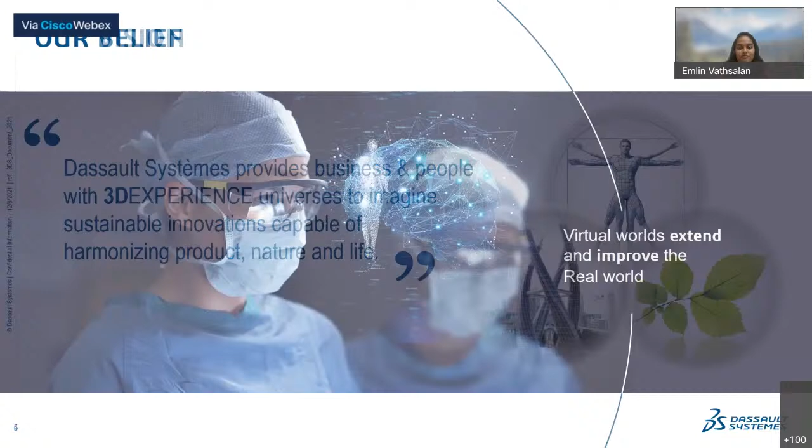Our vision is to provide business and people the ability to imagine innovations that are capable of harmonizing product, nature, and life - which means we want to live sustainably, and we believe this is possible only through engineering technology. We profoundly believe that virtual worlds extend and improve the real world. There is no such thing as rehearsals in the actual world, but in the virtual world we can simulate and evaluate the impacts that a product has on the ecosystem. So before the product is even produced, we can leverage and exploit the virtual world in order to have a sustainable future. We inspire and support our customers to leverage the virtual world through simulations and improve toward a sustainable future.

Now that we have seen a good overview of Dassault Systemes, I would like to step into the next topic, which is the industry challenges that the aerospace and defense industry is facing in today's world. We all know that this is the age of digital transformation, and in this age there are a set of challenges that the industry is facing. In specific, the aerospace industry's biggest challenge is the budget and time constraint.

Today the A&D industry is facing difficulty in controlling cost overrun, and is also missing delivery deadlines. This has not been a rare case - it has become a usual or common scenario in the past decade. So this is one biggest challenge with regards to budget and time constraint.

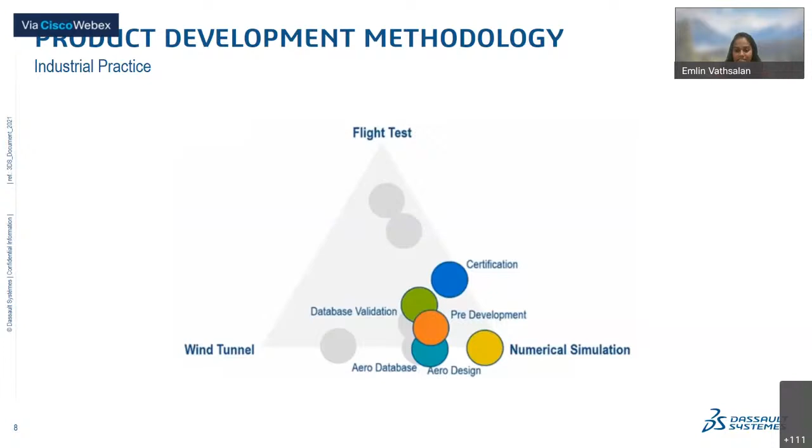So now with this emerging industrial practice, the time to market cycle is compressed. Now we do not have to think about physical testing. It can either be reduced or even replaced by numerical simulation. And just right after the preliminary or detailed design phase, we can straight away jump into the flight test or the prototyping test. So this is the industrial practice that is emerging.

Today, in specific, we will be focusing more on the fluids pillar, and we will look at the offerings that Simulia has to cater to customers when it comes to the Simulia fluids portfolio. So in the Simulia Fluids portfolio, we have two major technologies and three major tools.

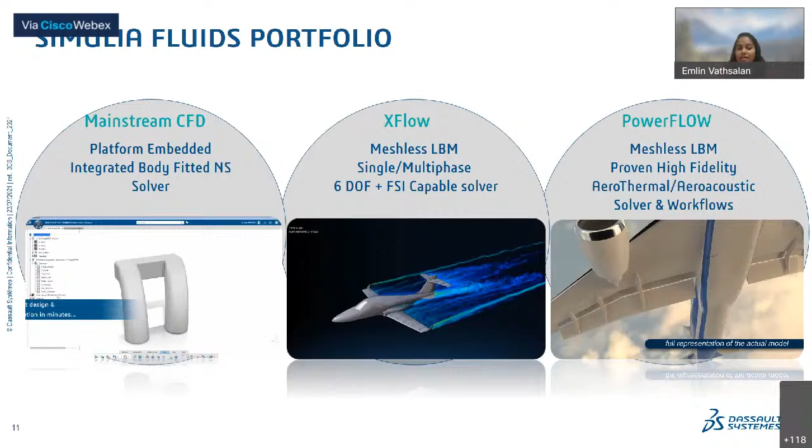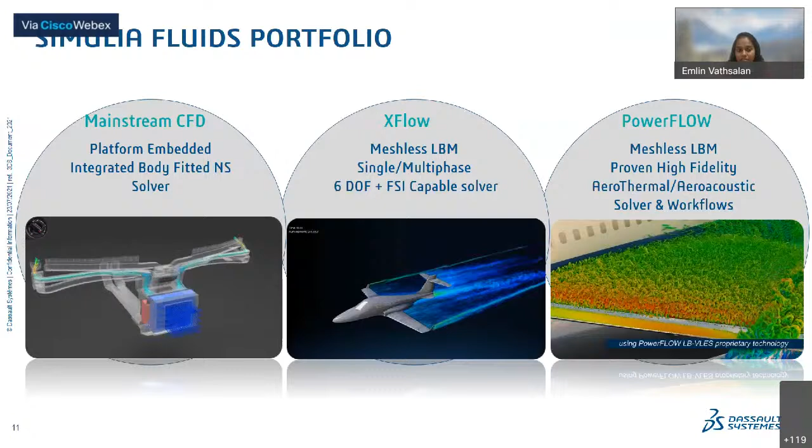The two major technologies are the RANS based solver and the LBM technology. And the three tools are the mainstream CFD, which we also call 3D Experience CFD, which works based on the RANS technology, and XFlow and PowerFlow, which work based on LBM technology. This mainstream CFD is platform embedded, and it has got body fitted meshing technology that is robust, with good hybrid mesher, hex dominant mesher, body fitted meshing capabilities, which is integrated into the platform.

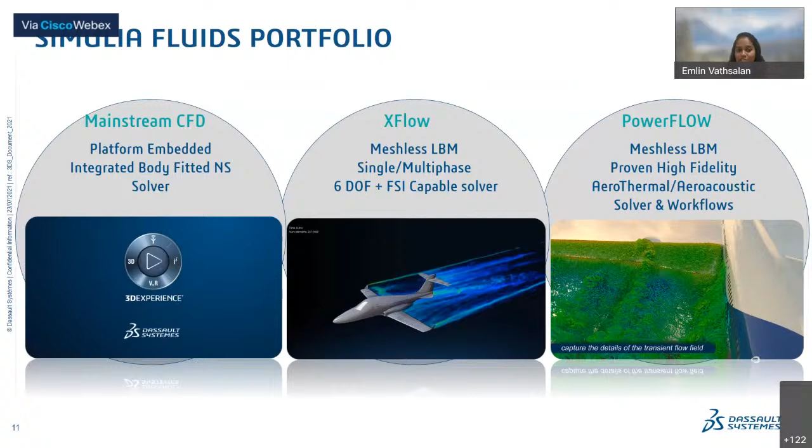Now, the highlight of mainstream CFD is it is CAD embedded, so it is integrated with the CAD. Whatever CAD design changes you make will immediately reflect in your CFD settings, so you do not have to revisit your setup for every design change, just make the design changes and run the CFD simulations. It is integrated so well that right after the design changes, you can have the CFD simulation results, and it is completely model based rather than file based approach.

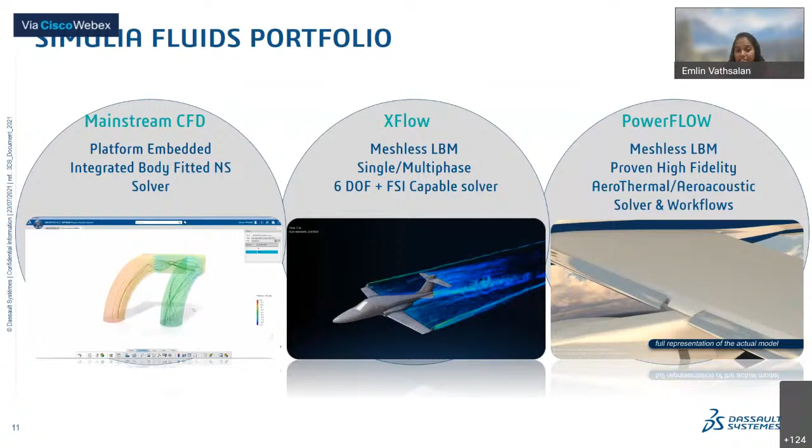Coming to the Xflow solver, we have different flow models available. One is single phase, the other is multi-phase, and another is free surface flows, and true rotating geometry capability is very much possible in Xflow. We have an inbuilt FSI solver and 6 degree of freedom capability here. We will look in detail about what else Xflow can possibly do.

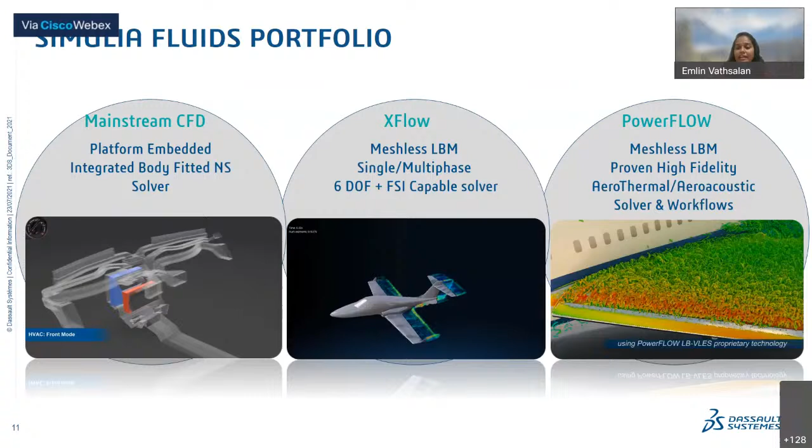Coming to the last one, which is PowerFlow, based on the LBM solver. This is the world leading best in class transient solver. It has meshless technology, which is proven for high fidelity, and it is suitable for aerothermal, aeroacoustic, and cabin comfort sort of problems, which is more relevant for solving unsteady and complex airflows.

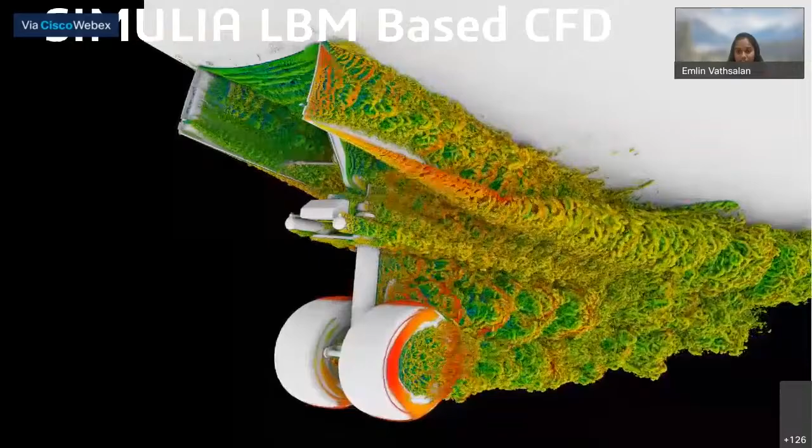Let me give you some of the benefits of the LBM based CFD. Here you are looking at a landing gear which has very fine details, minute details are also captured, and the flow is highly complex and highly unsteady. LBM based CFD, which we call PowerFLOW and XFlow, which uses the LBM technology, is inherently unsteady.

So whatever solution you have is time accurate, right? And let me give you the advantages. Here we are looking at real world geometry, and this real world geometry can be accurately captured in the simulation. You do not have to do any simplifications in the geometry. Since this is using a particle based approach, it can handle any degree of complexity in the geometry.

Also unsteady flow, as I said, it can capture very well, so high transient fluctuations can be captured very well. It is known for its proven accuracy because this methodology is being developed in partnership with established institutions like NASA, etc. So we have the best number of white papers and publications available for its accuracy. Last but not least, this is highly efficient and proven for good scalability performance. You can run it over any number of thousands of cores, and this will have reasonable efficiency and reasonably accurate results as an output.

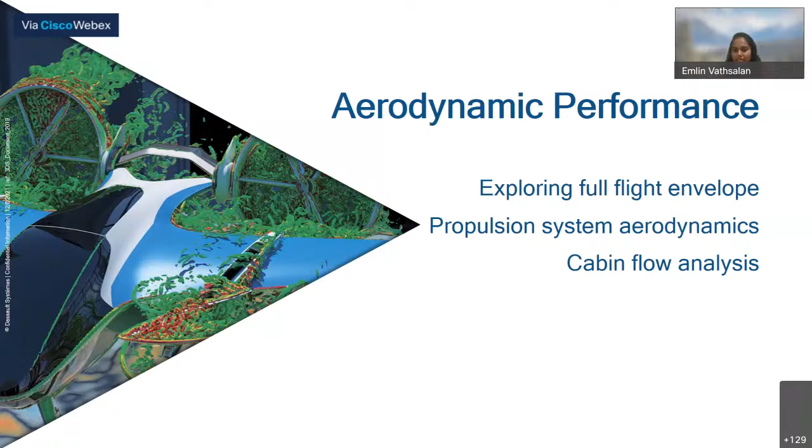So today in the session, we will look at some of the fluid solutions that these solvers can address. I will take you through the first three solutions, from aerodynamic performance to optimization, and my colleague Darshan will begin with the acoustics, aircraft acoustics to FSI. So let us begin with aerodynamic performance. Under aerodynamic performance, some of the subtitles I would like to cover are listed here.

Any available code in the market. But when it comes to region number 1, which is the center of the envelope, that is called the cruise condition, this can be handled by any traditional code in the market. But when it comes to the second through fourth region, which starts off with takeoff, basically the flap down condition, which is usually the case in takeoff, landing, and low speed stall.

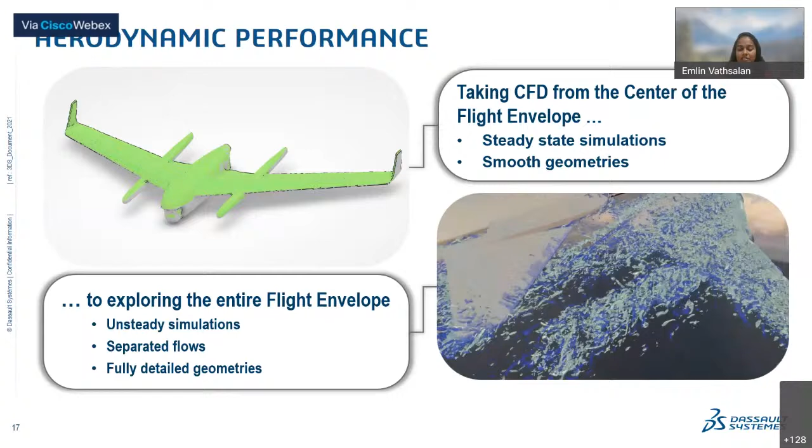Just as you know, when the flap up or flap down condition is there, we have some cavities to be considered, and highly complex geometries to be considered in that case. So we can capture those minor details in the geometry as well, and precisely predict the unsteady flows.

Let us look at some of the workflows. Starting from the cruise condition, we have the 3D Experience platform CFD, which will address this cruise condition, which is RANS based. Here we are showing you a model which is developed in partnership with Wichita State University at the National Institute of Aviation Research.

This geometry is particularly fully parameterized. As I said, the CFD on the platform is completely integrated with CAD, and whatever CAD design changes you make, the CFD simulations can be run automatically for those design changes, and the mesh gets updated automatically. You do not have to come and update the mesh every time manually. It is all automated, so the mesher is pretty robust.

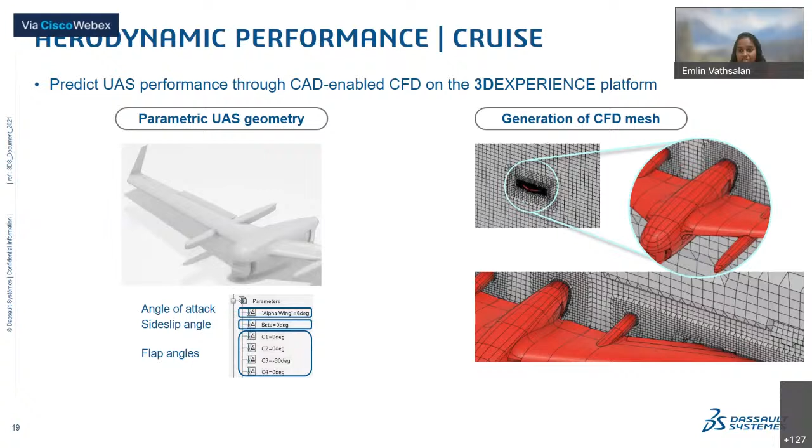We have a body fitted hex dominant mesh where the prisms are put in the boundary layer, and most of the fluid domain is filled with hex dominant meshes, in order to reduce the overall turnaround time.

The user interface is pretty simple. We have flow conditions, and the boundary conditions can be directly specified without any complexity. We also can perform process automation. Say, for example, you have a number of design parameters to be run for different boundary conditions. You can set up a loop, and the process automation can be done on the platform.

When we look at the CD versus alpha curve, we can see close match for some points, but when the angle of attack increases, there is a slight discrepancy. So now this hits the limitation.

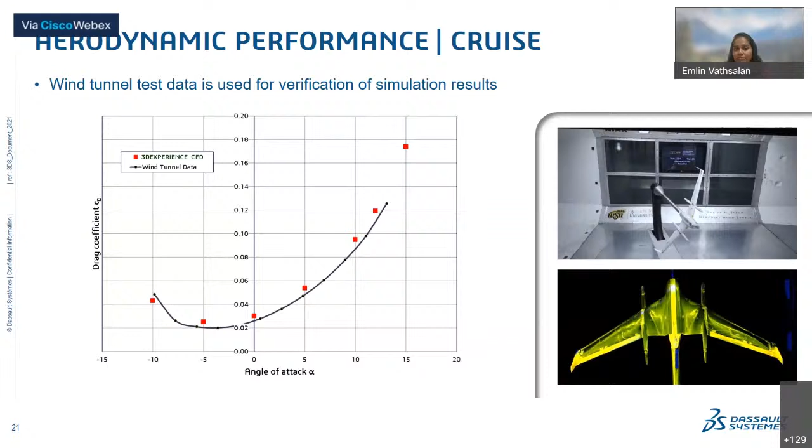Here the linear range of cruise condition is crossed, and therefore the non-linearity can be predicted well by using the complementary technology, which is LBM based.

Let us now look at the next workflow, which is the high lift configuration. Here you are looking at a wind tunnel testing, or the test case that is coming from the drag high lift prediction workshop. So this is the test case.

We are looking at some separations in the wing tip and the trailing edge and the main wing. Some flow separations are happening, and towards the inboard, there are some inboard vortices. So now this is pretty complex, and the flow is purely unsteady and we can see some separated flows as well.

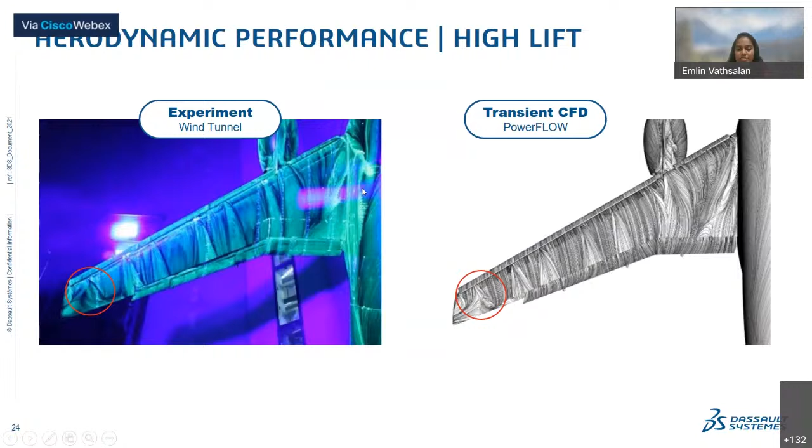Let us now see how this is predicted using PowerFLOW, the transient CFD, which is based on LBM. Towards the wingtip, we can see the separated flow region, which is exactly captured in the PowerFLOW streamlines picture. We can also see that the main wing has got some flow features that are also highly precisely captured.

And the best part is the inboard vortices, or the flow separation happening in the inboard region. This is highly complex to capture for any CFD tool, but with the LBM based technology, this can be precisely captured.

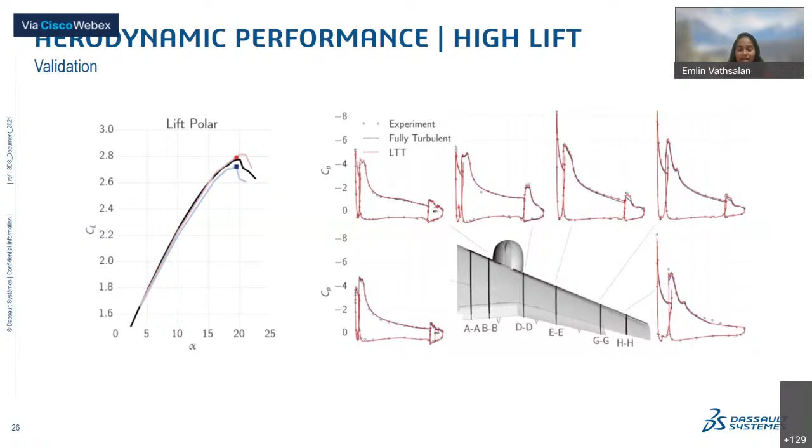Remember that we are looking at the pressure coefficient at an angle of attack close to 20 degrees, and we are looking at some CL max. So the prediction of CL max is accurate, and the pressure distribution for such a higher angle of attack is also precisely captured. This is favorable for any high Mach number, high load factor, or high angle of attack kind of problems.

So the next one is the buffet onset. Here we will see the flap down condition. As you can see, the flaps are bent down, and we can see the flow features that are highly complex.

At minimal angle of attack, say 2.83 degrees, this is pretty simple to be captured by any tool. But when it goes to a higher angle of attack, shocks begin to appear on the surface of the wing, and therefore shock induced separations may also occur.

So here in the experiment, you're actually seeing the wave motion that is happening. To your left is your experimental result, and here we are looking at the PowerFLOW results. The wave motion captured in the experiment is also precisely captured through PowerFLOW simulations. And not only at 5 degrees, but when you go higher, to 6 degrees...

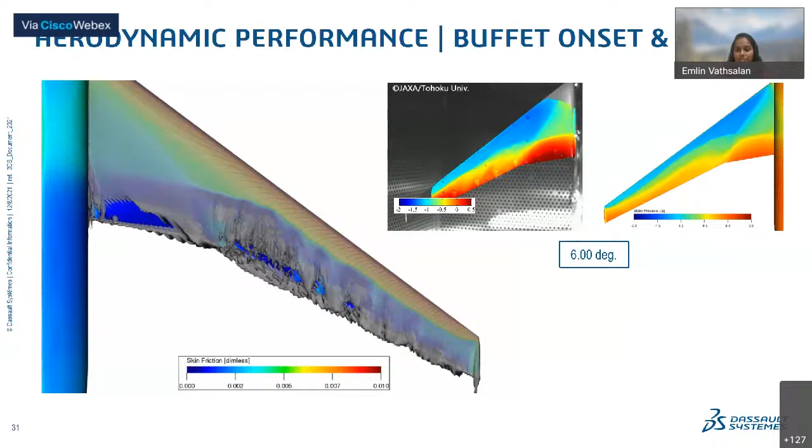The match is even better when it climbs high. So we are in close agreement with the experimental result.

And also, this is a post-stall regime. So prediction of post-stall and the buffet onset is also accurately captured using the PowerFLOW simulation.

So here you are also looking at the CL versus alpha curve. For any CFD or traditional code, we may be able to look at the flow till the stall angle of attack. But beyond the stall region, the lift curve becomes inaccessible for any traditional code. Here we are actually looking at the flow behind the post-stall region as well, so the post-stall regime is also accurately captured.

And moving on to the next workflow is icing. Here you're actually seeing the ice that is scanned from NASA Glenn Center. It may look complex, and it may not be this complex in real aircraft, but looking at the geometry itself, you may understand the complexity of the flow features as well.

This highly complex geometry may not even be able to be meshed in some of the codes available in the market. But here, the degree of complexity doesn't matter. The mesh works perfectly fine, and you can see the complexity of the flow behind this icing condition. We can also see the surface streamlines matching the experimental result.

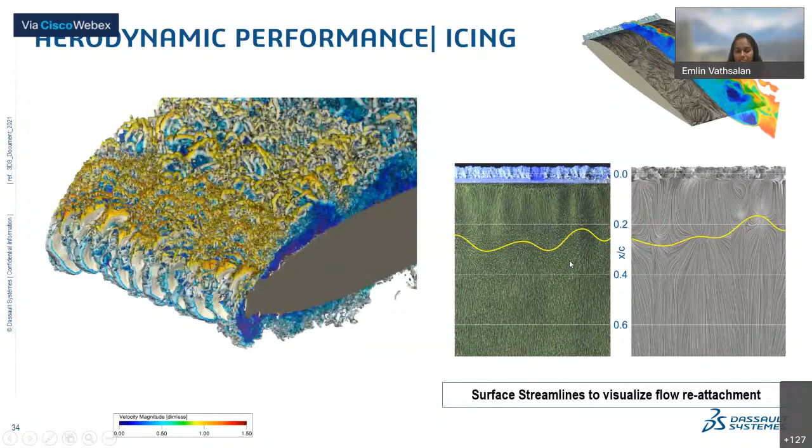With these aerodynamic performance workflows -- with the current process, a number of configurations are tested in the wind tunnel for a new aircraft model, and the CFD is largely limited to only the center of the flight envelope, with turnaround time taking even a year and lead times even longer. But with introducing simulation upfront in the overall product development cycle, we can replace 50% of the wind tunnel configurations with unsteady CFD.

Through all these workflows, by now you should understand that CFD can be used for the entire flight envelope, from concept to certification, exploring the complete flight envelope, not just limited to the center of the envelope. This is actually smart testing, combining both wind tunnel and simulation, and we can continuously update the digital model -- there is no loss of digital model here.

So you prepare one model for aerodynamics and reuse it for acoustics, cabin comfort, and so on. So there is digital continuity in this particular process.

I would also like to show you some other slides with regards to propulsion system aerodynamics. We all know that engine design also requires aerodynamic performance to be assessed. Here we are looking at some stationary parts and some rotating parts. We have true motion to the geometry, and we can capture the complexity of the flow that happens between the stationary and the rotating part. That's what you're seeing right now.

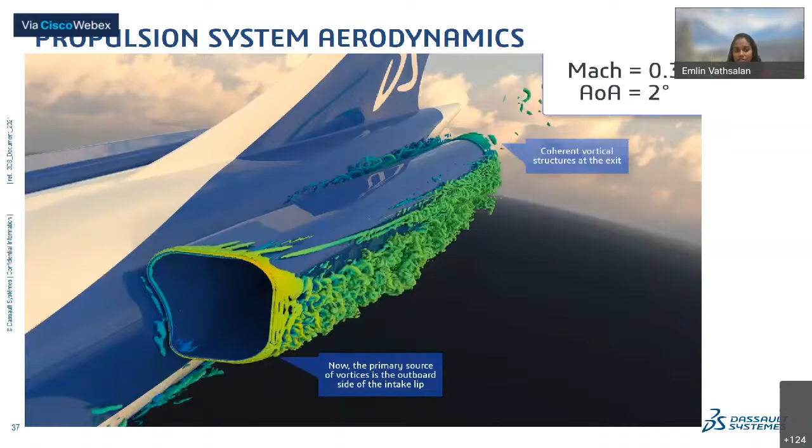One more thing we can do is engine and airframe interaction. Having an engine as a standalone and performing the aerodynamic simulation is different, but when it's installed on an aircraft the behavior might change. That's what we can capture using interaction aerodynamics. Here we are looking at how the propulsion system interacts with the fuselage airflow, and for different angles of attack and different Mach numbers, the flow itself is changing. The flow behavior can be accurately captured.

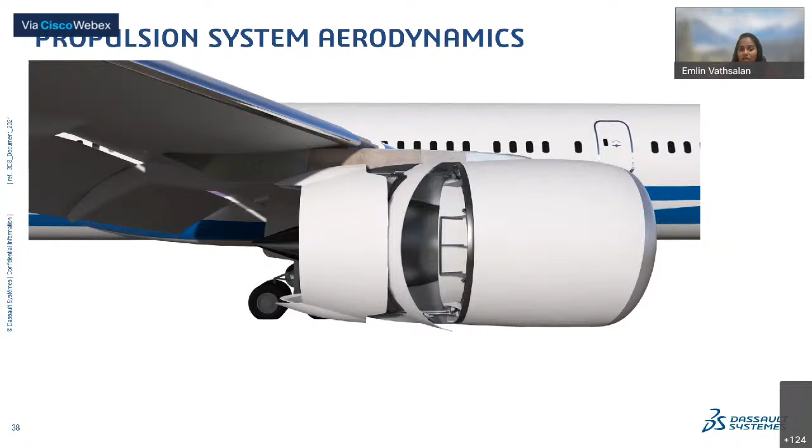Here I'm showing you an example where Airbus, in partnership with Dassault Simulia, developed a thrust reverser unit in a matter of 80 days. Here Airbus is using the 3D Experience Center in Wichita. We can see the thrust reverser being used, and how the complex airflow and its unsteadiness are accurately captured.

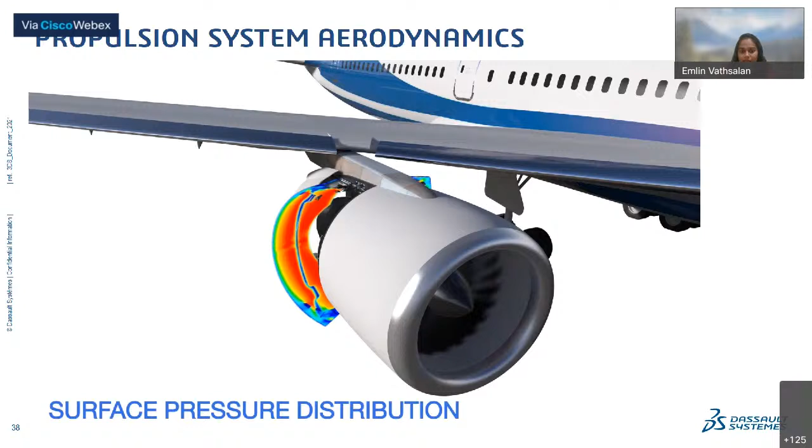From concept to prototype in just 80 days - think of how much more efficient this can be when it comes to real aircraft development. This can drastically reduce the overall turnaround time. We can also look at the surface pressure distribution over time as well as averaged. Using this, we can validate new solutions digitally and launch them without any delays.

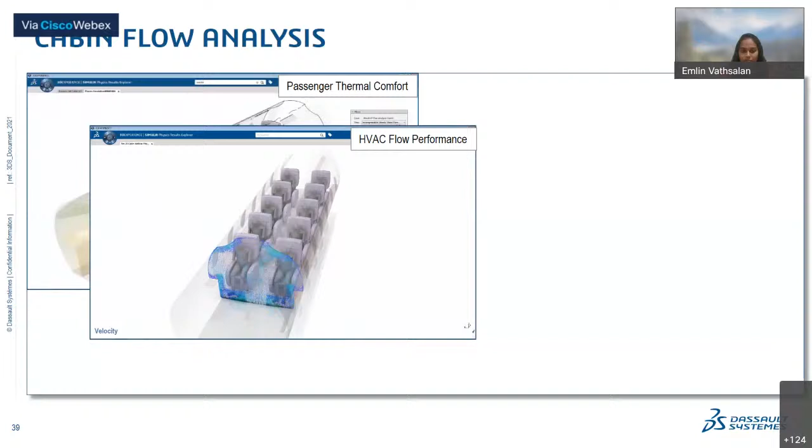The last subtitle in aerodynamic performance is the cabin flow analysis. Not only the exterior aerodynamics but also the internal cabin flow analysis can be done using the 3D Experience platform. The HVAC unit can be optimized. Based on the flow analysis, we can decide on vent sizing, and vent optimization can be done.

Today, the need of the hour is whether a pathogen is spreading inside a cabin. That can also be done using the 3D Experience platform, because we have multi-species capability, using which air quality control can be modeled. Based on this analysis, the number of vents can be decided, and the number of seats can be decided.

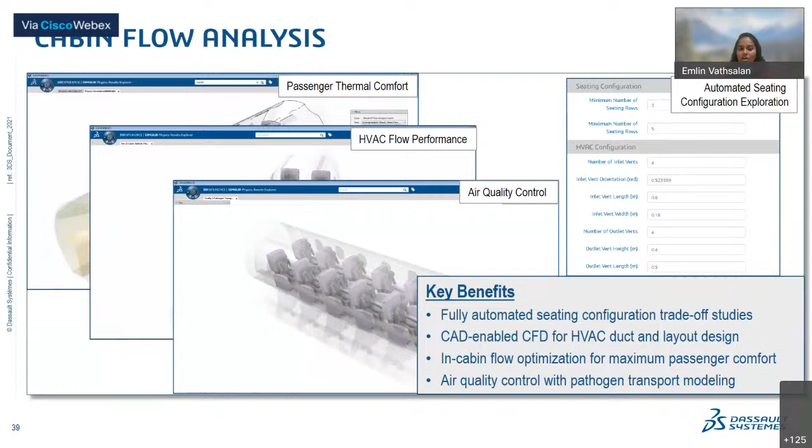In fact, the seating configuration can be changed just because it is CAD-enabled CFD. We can quickly see how many seats can occupy the space and how many vents are required for such a seating configuration. This is one thing, and here you can see the HVAC and cabin detail geometry used in the simulation.

We also have a best-in-class human comfort model in PowerFlow, which can accurately predict passenger comfort, both local comfort and overall comfort.

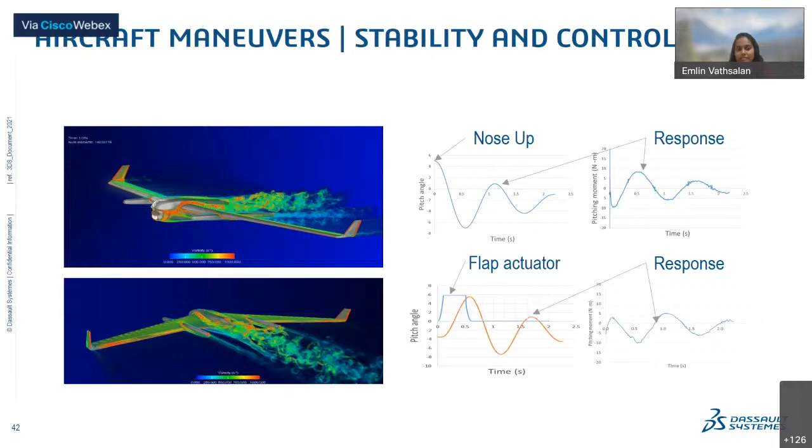The next topic is aircraft maneuvers, under which I'll be talking about stability and control and flight handling - this will be real quick. Here we are looking at an X-Flow simulation. The first animation shows a nose-up condition, basically enabling a rigid body dynamic model. You're putting a drone in the fluid domain, fixed in 2 degrees of freedom, and allowed to move in 1 degree of freedom. You can see how the flow fluctuations happen and how the damping occurs.

In the second animation, you are looking at a flap actuated for a particular amount of time, say 0.5 seconds. The flap is actuated and then left off, and you can see how the damping of the flow fluctuations happens and how the response is accurately captured.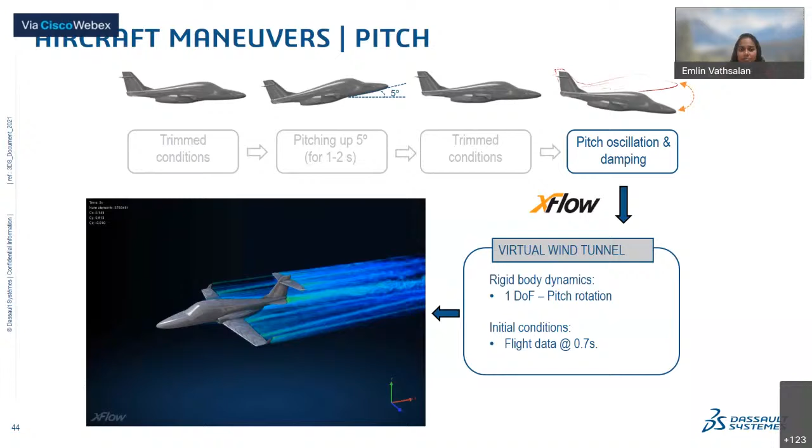This is the inherent FSI solver coming into picture, where the flow forces are interacting with the body and changing the position and orientation of the product. Not only that, it can also be integrated with a secondary tool, say a structural solver, for example Abaqus, and it can have a co-simulation. So the fluid forces can go to the structural solver, and the structural solver in return can give you the new orientation and position of the aircraft.

The last topic for my presentation is the optimization part. As I was telling you, highly complex flows can be captured very well. Not only that, we have a latest functionality called design guide, using which an engineer can be guided through the design process.

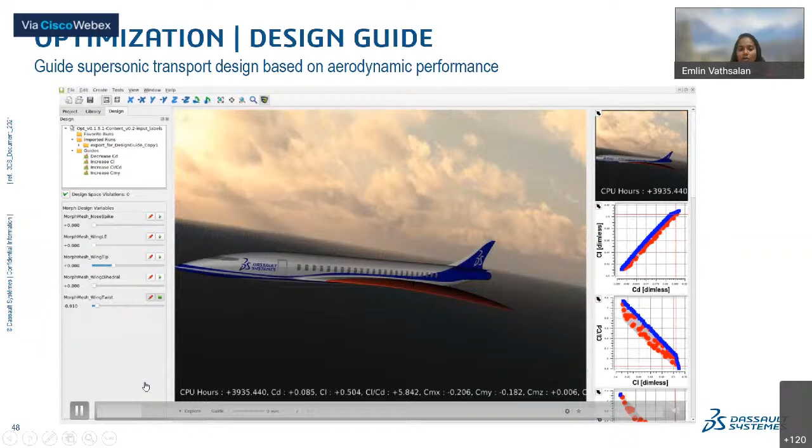For example, here we are showing you a transonic or supersonic business jet. On the left, you are looking at the features or design variables that can be changed in the simulation, and you are seeing the response curve - the aerodynamic performance, the CL/CD graphs. So if I move further ahead, here you are looking at how the wing twist affects the CL/CD performance. As you change the scroller, you can also see the CL/CD performance corresponding to that particular design variable.

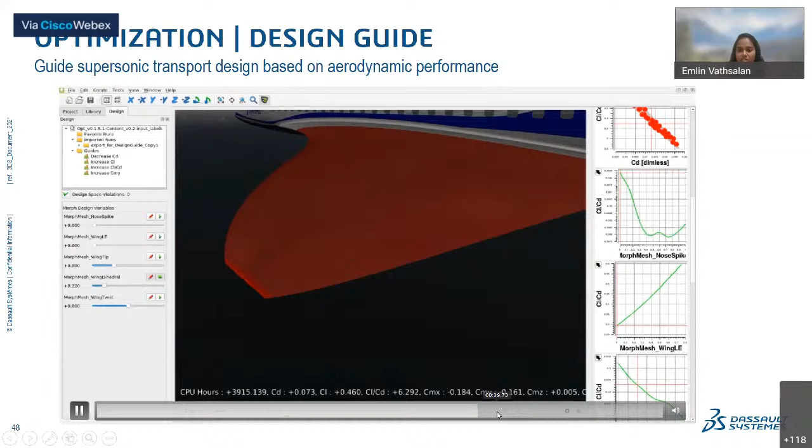Not only that, if you switch to the guide mode - a second mode - it will give you more insights such as a Pareto graph using which you can do a design trade-off. And here also, this color map will show you how to move your geometry towards the optimal point. So those kinds of design changes can be done using this design guide. This is the design optimization.

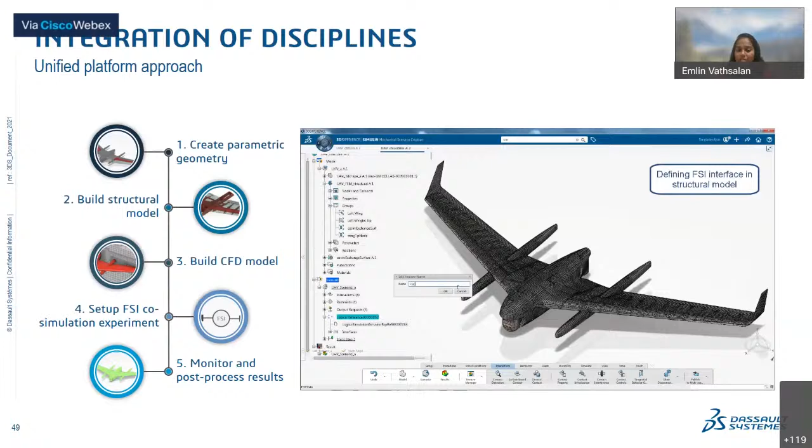Not only that, we can also integrate multiple disciplines inside the platform. Here, for example, we are showing you a CFD model built as well as a structural model built for this particular drone model. So whenever the design change is happening, say for example the flap angle is changing, then the mesh - both the structural and the CFD mesh - gets automatically updated, and therefore you will be able to do both CFD and structural analysis together simultaneously on the platform and do an FSI simulation.

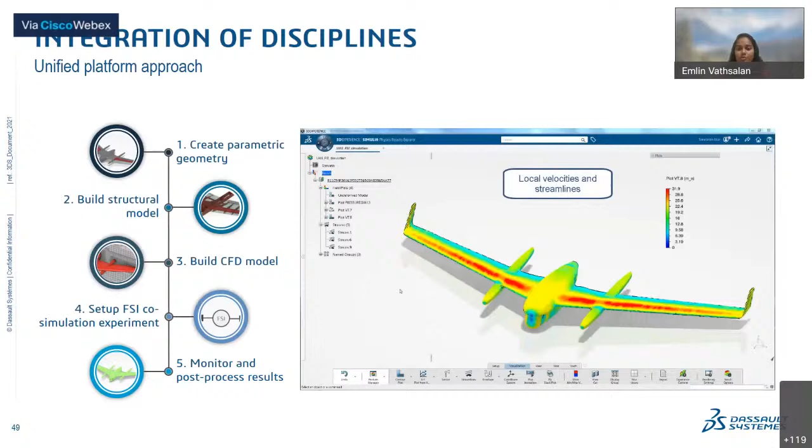Towards the end of the video, you will be able to see the results. Basically you will specify the interaction surface for the fluid structure interaction, and you will be able to look at results like this towards the end of the simulation. So integration of multiple disciplines is very much possible on the 3DEXPERIENCE platform.

The last subtitle that I wanted to discuss is the multidisciplinary optimization. So far we've been seeing aerodynamic performance and maneuvers and things like that. Now, when you want to do a multidisciplinary optimization, including aerodynamics, structures and EMAG, we have powerful capability on the 3DEXPERIENCE platform.

Usually in an organization we have file-based or siloed systems, and a CAD engineer is working at his own desk with a disconnected point solution, a CFD engineer working in a siloed process, and a structural engineer coming with a different result. So unified database management is a big challenge for an industry today. What we propose with the 3DEXPERIENCE platform is a model-based unified platform approach, so starting from design to certification across all enterprises, every solution is connected on the platform.

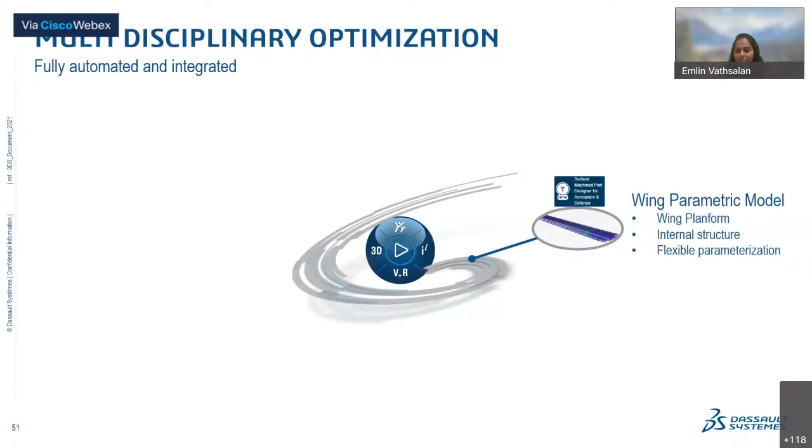In fact, we have done a similar project for one of our customers which is fully automated. We have the 3DEXPERIENCE platform in the center, and we did a completely fully parametric wing with a planform, internal structure, and parameters fully parameterized. And we performed an aerodynamic simulation on that, considering the cruise condition and the dive speed.

And we performed a structural simulation for that as well, assessing the upbending and downbending limit loads, doing structural and buckling load analysis. And basically we explored the design space. We did a fully integrated or automated design exploration, and then we arrived at an optimal point. So therefore this ended up with a multidisciplinary optimization.

And this work is being published in the 4th National Conference on MDO. This is jointly done with NAL, and the paper is available online.

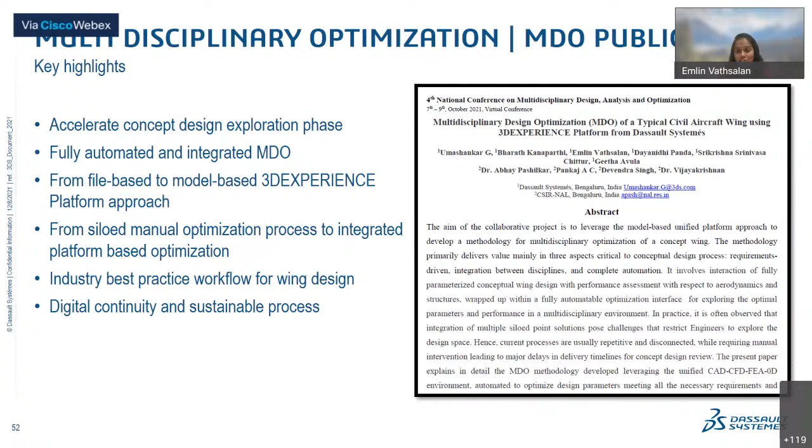The key highlights of this paper on the MDO part is through the methodology proposed by Dassault Systemes. The concept design exploration phase is accelerated, and this is a fully automated and integrated MDO process. There is a shift from file based to model based approach. Instead of working in silos, people get to work on a platform based integrated approach, and therefore the optimization becomes much easier. We have also proposed the industry standard best practice for concept wing design, and there is no digital loss. There is reuse of the model and reuse of the methodology, and therefore this is a sustainable process.

So overall, through this presentation, we looked at different solutions. As a summary, we can drastically reduce expensive internal testing and make use of state-of-the-art fluid simulation solutions. This will also compress the time to market cycle, and enhances simulation-driven design and innovative designs as well. This is highly accurate and proven for its accuracy, and it is available for the entire flight envelope, from cruise to high speed stall or low speed stall or buffeting conditions. Through this, we can increase certification confidence by leveraging high fidelity CFD methodologies.

So this is what I wanted to present, and now is the Q&A session. Thank you so much for your attention.

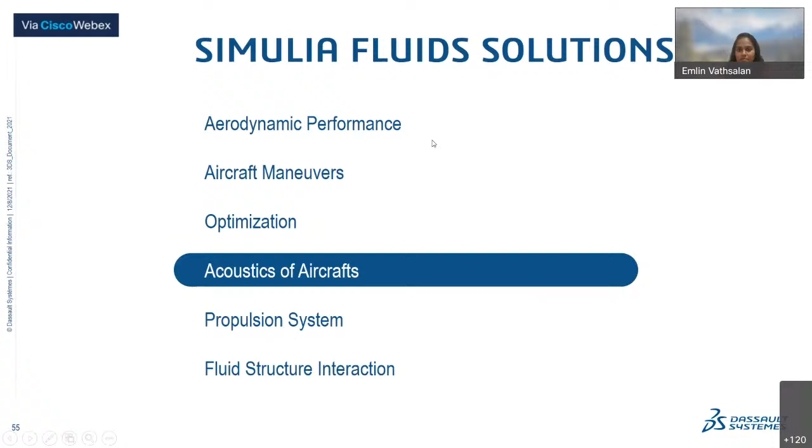So you are asking where can I learn Simulia? You can definitely reach our website, which is 3ds.com or the Simulia website. You can know more about our solutions and reach out to our experts to learn more.

With respect to design optimization, the CFD model used was LBM. And when it comes to multidisciplinary optimization, it is the RANS-based solver. Yes, PowerFLOW is particle-based. It doesn't fall under finite volume or finite element.

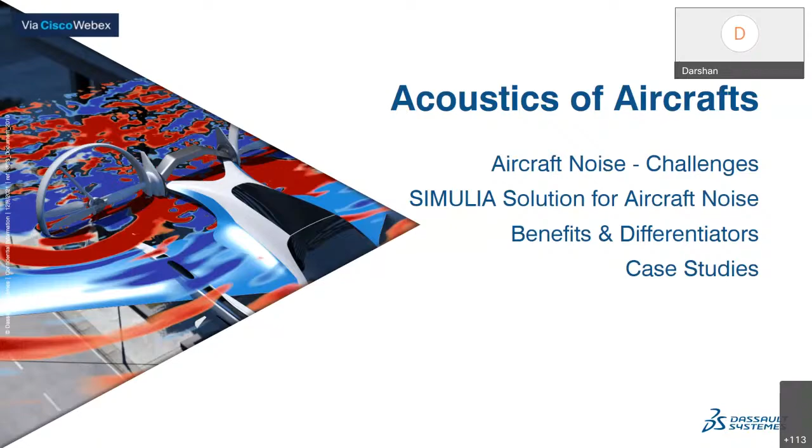And then some of the case studies where we have worked, either in terms of validation or cases where we have actually worked on the project and provided design solutions that brought in a reduction in the noise generated by the aircraft itself.

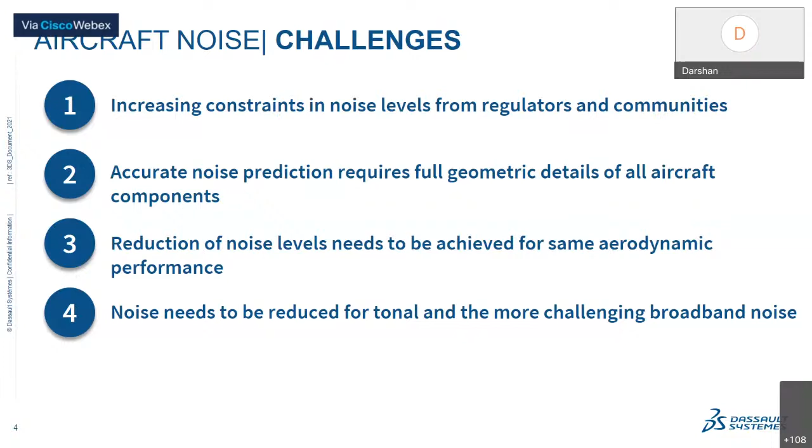And today, the Simulia solution provides, or is capable to address, each of these noise problems, at the same time able to assimilate all the noises being measured together and give the overall noise that would be generated by the aircraft itself.

So here I'm putting 4 points before taking you to the solutions - the 4 benefits that the solution would offer for addressing aircraft noise. One is the possibility of assessing noise sources virtually without having a prototype. The fidelity of the solver is so high, it takes into account all the geometric details required without compromising on the smallest details, because for acoustics, even small geometries could account for the overall noise estimation.

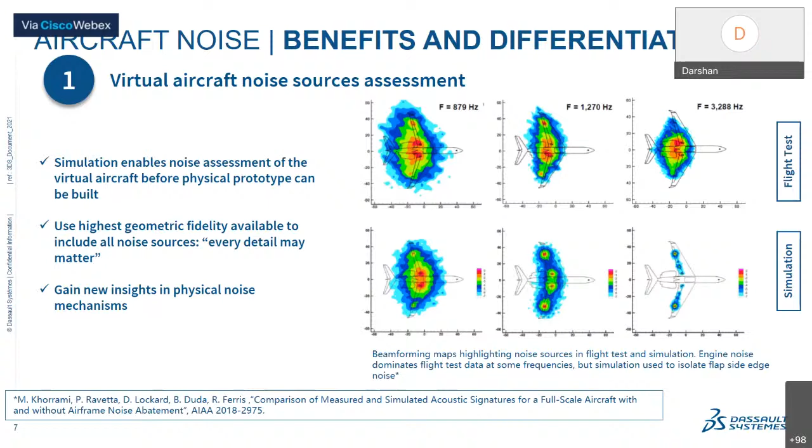So a simulation like this actually helps us identify what the source of noise is. Once you have identified the region, then you jump into that particular region and start working on improving the design. This is the second benefit, which is designing for reduced noise.

And this fairing has a lot of pores, and all of these pores are resolved and simulated. You will be seeing more details in terms of how this fairing has actually performed well in reducing the noise in the following slides.

Starting with identifying the noise source, then we know the source and we work out certain design improvement options. Then what can be done is to look at how this particular design has resulted in terms of the noise footprint that it would create on the ground.

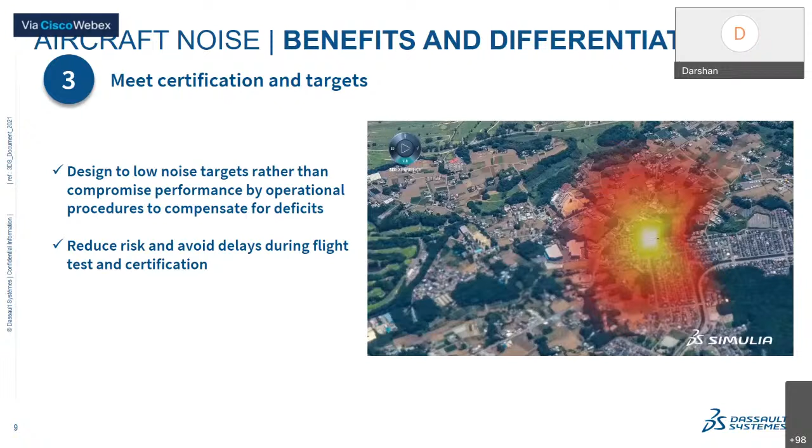Like this, well before the flight test is carried out for certification, we know the design product is well within the limit, thereby avoiding late stage risks, such as identifying that it may not meet the target when you are actually carrying out the flight test.

And the last point I spoke earlier, which is improved product quality. Having designed for lower noise, what we would be ending up with is a quieter aircraft, which is going to be well accepted in terms of regulation requirements, as well as in terms of benefits that you would get at the airports.

With this, I want to play one video that highlights the overall process that is involved and what kind of details we actually capture while looking at the simulation results, and how these flow details help us in predicting how acoustic waves are generated from different parts of the aircraft.

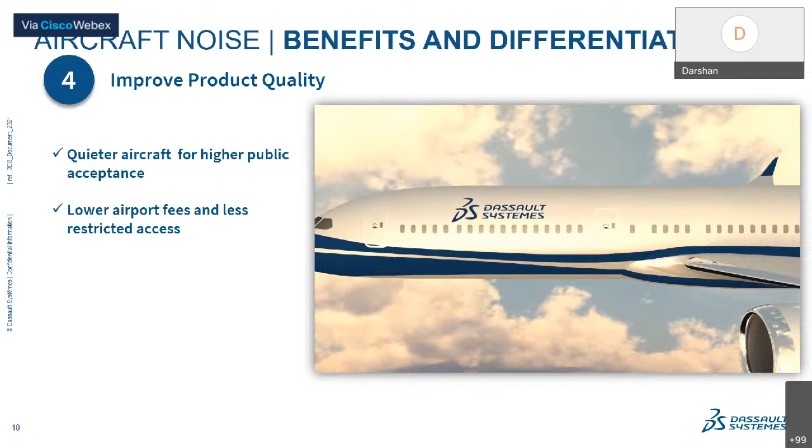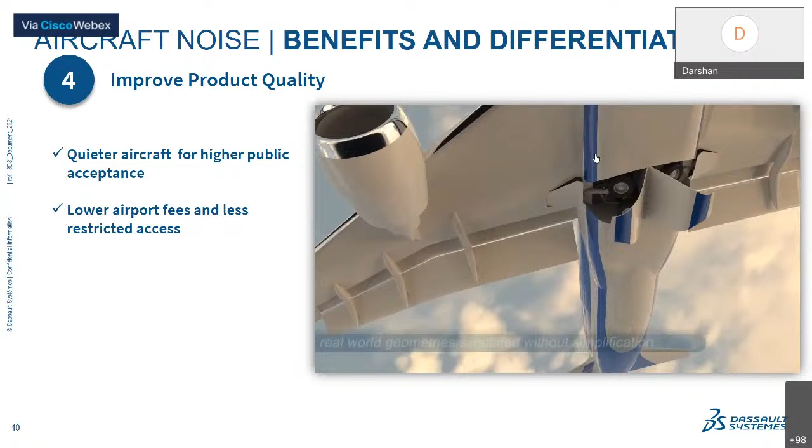So what you are seeing is a concept aircraft that's designed within the system. And what you are seeing over here is a wing with all the details in terms of slats and flaps, which has been fully deployed, including the landing gears, and the detail that's present in the geometry.

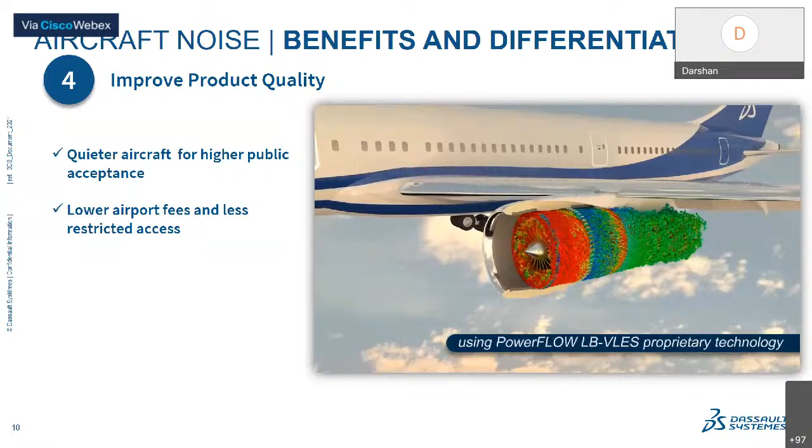Like I said, it's a concept, but you will be able to appreciate this when I show the real world problem we have looked at, in terms of the level of detail being taken into consideration. So here you can see all the flow details coming from the wing and slats, and all the minute turbulences, which is well captured, which in turn means capturing all the pressure fluctuations happening in that turbulent field as well as in the fluid domain.

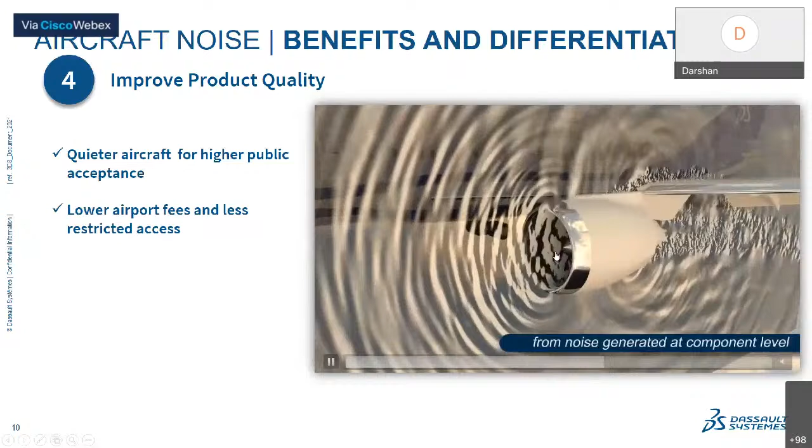So with this information, we can actually generate information like this, which is nothing but the pressure fluctuations at a certain frequency where the acoustic wave is propagating from the leading edge, trailing edge, and then you see the acoustic waves generating from the engine and the landing gear, and all these things are the small scale turbulences coming from the landing gear itself.

Now with the information of all the noise contributors, we can actually propagate that to far field noise, which is basically the noise that's going to be perceived at a far location from the aircraft, such as the ground in this particular example. So on the ground, this is what the noise map is going to look like.

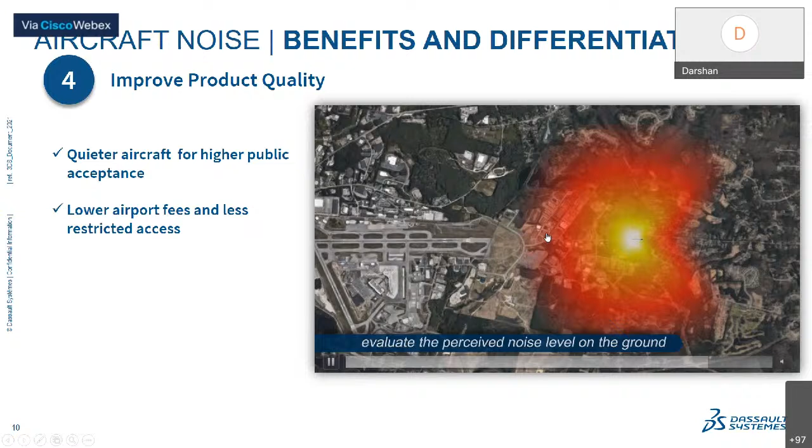So the flight is approaching near to landing, and that is the noise map. Here in this example, we have an observer standing on the ground, and the flight is approaching him and then departing. And then we see what is the highest level of noise he would observe, and how it diminishes once it travels away from the observer.

Such detailed outputs can be obtained from carrying out an acoustic simulation.

Now, very briefly, I want to show the workflow involved in addressing aircraft noise. It's not too different when we compare it to any of the typical simulations that we carry out.

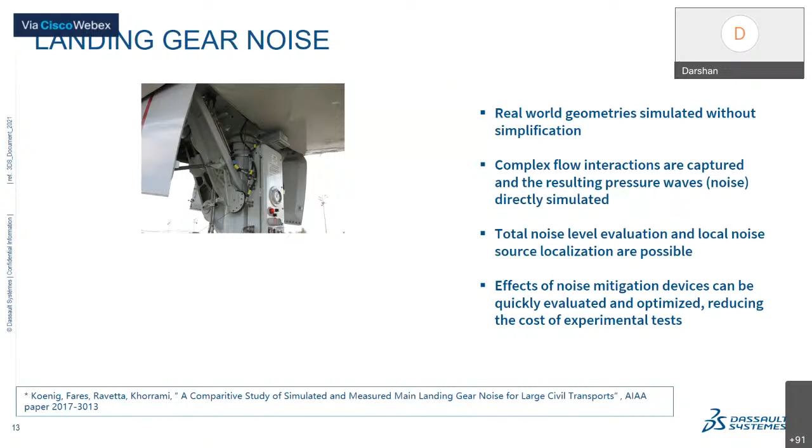As a first case, let's look at the landing gear. What you are seeing here is the real landing gear, and then the geometry version that is taken for the simulation.

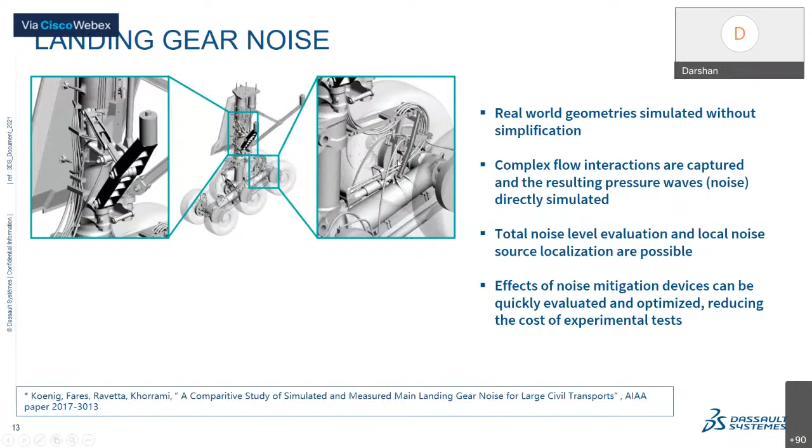This particular work isn't just about looking at the baseline, but improvising the landing gear for reduced noise using one design method called toboggan fairing, which looks like a toboggan used in icy areas to slide. Such a design is proposed where it covers the central part of the landing gear.

Again, a beamforming technique is used where you have a lot of microphones, and this is going to project what the noise source is going to be on this plane and that particular plane.

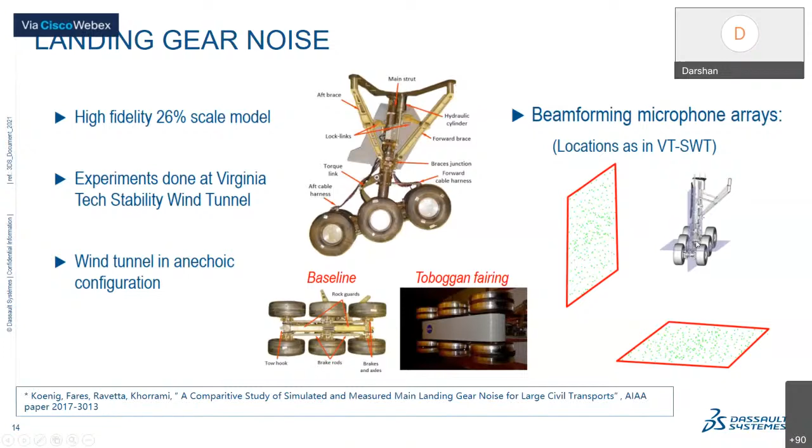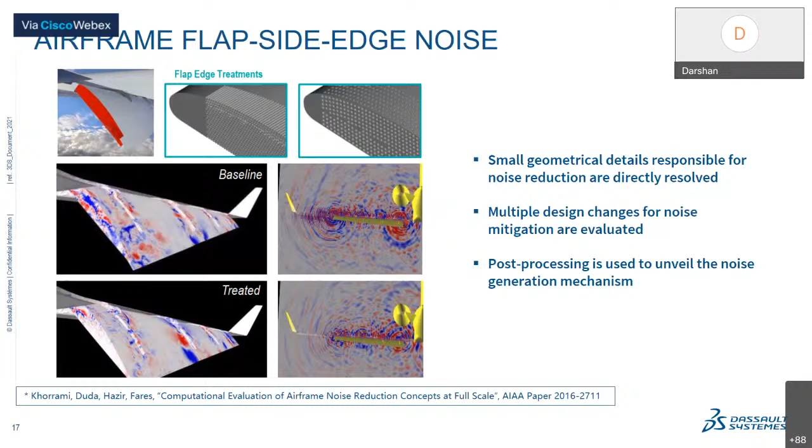What it shows is the simulation is able to produce the same kind of results as the experiment, which means you can develop enough confidence in the solutions provided by the simulation, thereby going ahead for improving the design for lower noise. And it's not just about addressing the jet noise in isolation.

Jet noise can be integrated along with, say, the fans, and then you have the high lift device. So all the installations are kept in place, and we can actually get the kind of noise that this installation is going to generate.

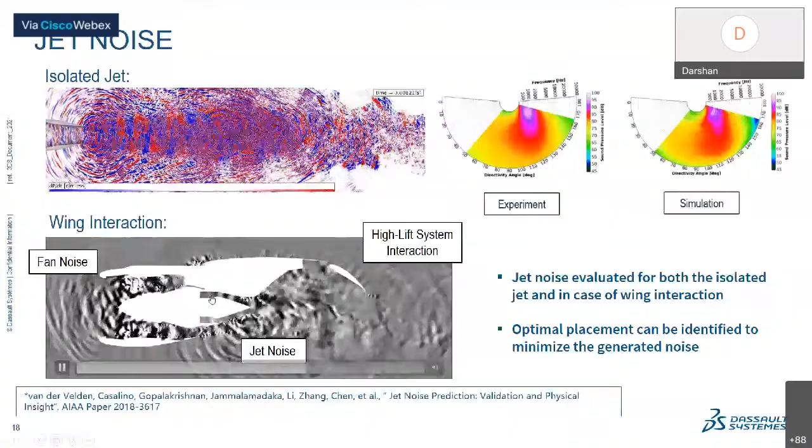Typically, it's not very normal to optimize a nacelle or engine in this configuration, because it's always been looked at as a separate entity and optimized that way. But when you actually integrate it with the whole installation, the story may be different. Our solution actually allows taking into consideration such complexity, and is able to get what kind of noise the overall system may be generating.

Another case study I'd like to present is considering the whole aircraft, how it's been used to assess where the noise is coming from, and then proposing the solution to reduce the noise. I've put 3 points highlighted earlier in terms of benefits: virtually assessing the source of noise, designing for reducing the noise, and meeting noise targets. So we have here two configurations.

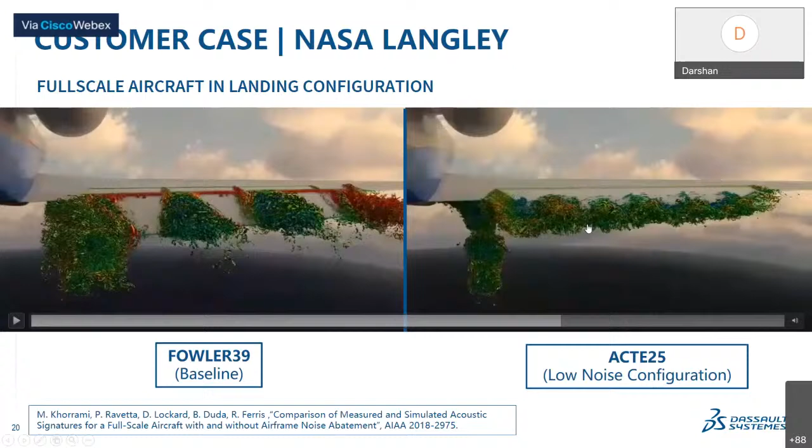The left one being a typical wing, where you have the flap in the normal way, where there is a gap. I'd like to pause at a certain region here. Then you have another config where the flap is blended quite well with the main wing, and we see clearly some difference in terms of flow structures. The level of disturbance present particularly in this area is largely reduced, which helps in lowering the noise levels. That's one of the improvements coming from the flap.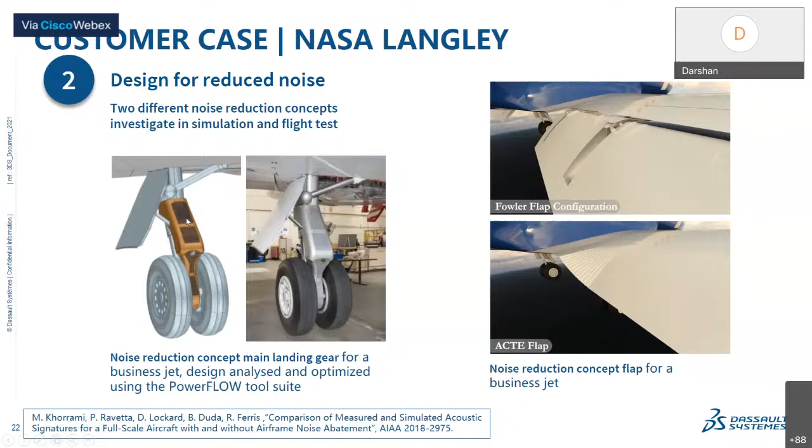So having known the area to work upon, what's been done is proposing a design solution on the landing gear like this, which is basically a fairing. Two types of designs were performed on this concept: a solid fairing where everything is closed, and another iteration where you see the black regions, which is nothing but a lot of pores involved.

I want to emphasize another point here: all this work was done in simulation first. We had no information from the flight test at that time. All this data was already in hand from the simulation results, and when the test was performed, it reconfirmed what was predicted from the simulation itself.

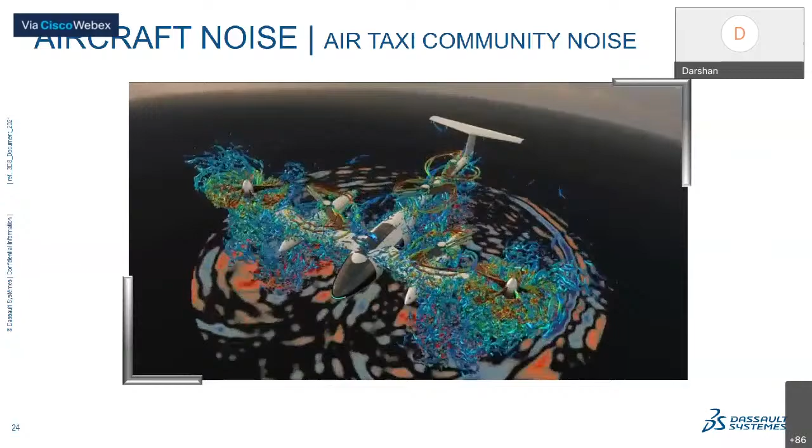Now, while speaking of acoustics for aircraft, one cannot forget these days the air taxi, or the small jets or small flights like what we're seeing here, because it's moving towards a new revolution where it's expected there will be a lot of such vehicles running around the city, transferring people from one place to another. Now that these aircraft are going to be flying within the city, it becomes quite important that they be much quieter, because you're in a city environment where a lot of people are exposed to the decibels generated from the aircraft.

I'd like to show how our simulation solution can very easily help assess what noise it's going to generate, and how small tweaks can be made so that you have a drastic change in improving the quality of the product itself. So here we have the acoustic simulation performed on the air taxi, and we see that the acoustic waves are coming from this particular location as an epicenter.

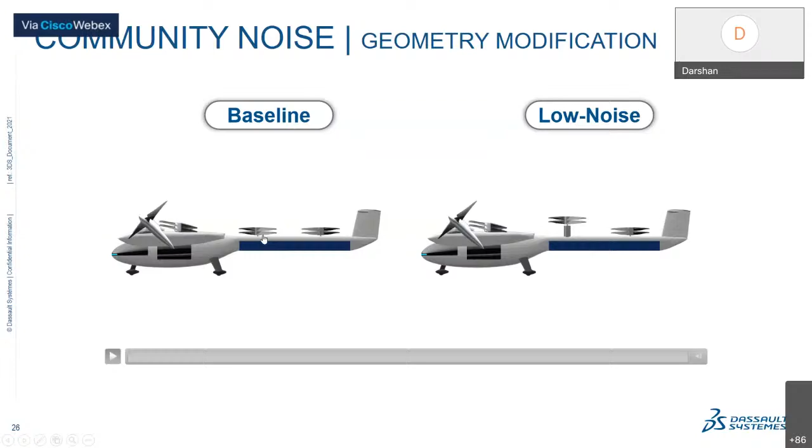What's been done is a simple modification, taking this particular rotor to a higher level compared to the original design. The effect is that noise is drastically reduced. One contributing factor is that the downstream propeller breaking the vortex generated from the upstream propeller is reduced in this configuration, helping reduce blade-vortex interaction, a kind of dipole noise, thereby reducing overall aircraft noise. When we look at the noise footprint on the ground, it is largely reduced compared with the baseline.

Now, moving on from the acoustic solutions, I would like to highlight some solutions that can be used for the propulsion system. It could be turbofan engines like what you are seeing here, or the rotors of a helicopter, etc.

Thanks to the adaptive mesh capability, even with all these complex maneuvers performed, the mesh can adapt to the body very quickly and provide the right results, without having to spend a lot of time figuring out whether you are getting the right mesh or not. So one such simulation result is what I would like to show here, where the blades were rotating.

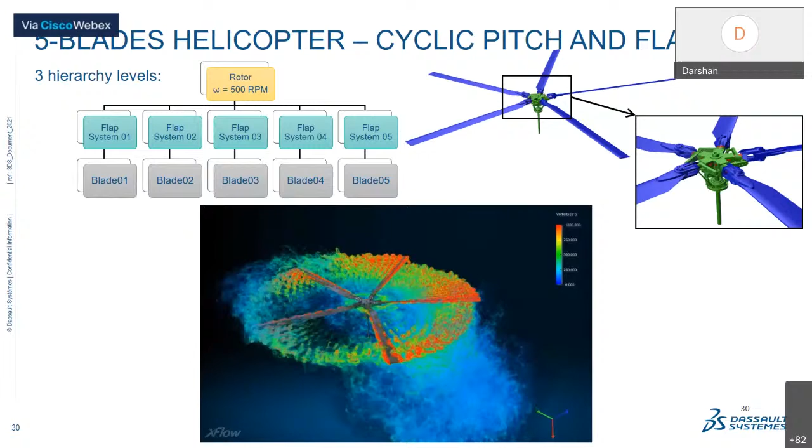With this we can know the kind of flow features involved, and we can also estimate the thrust this particular blade can generate. And since it's asymmetric in nature in its performance, the roll movement or yaw movement it can bring, all this information can be obtained.

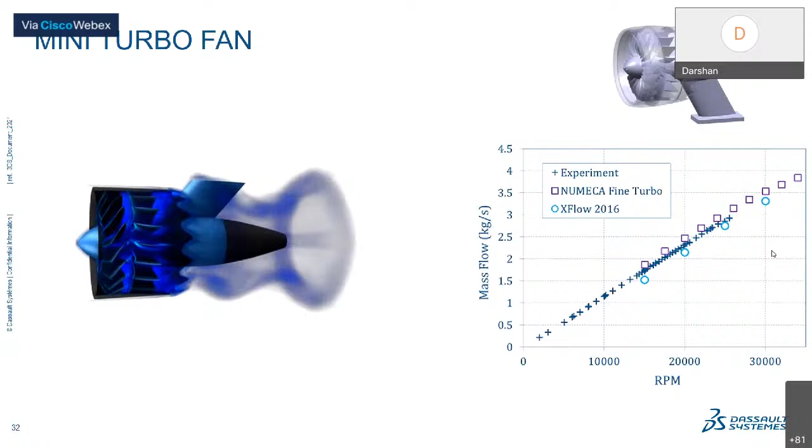Same thing for a different engine setup, where the idea is to see the amount of mass flow the particular engine is able to generate. Again, it's simulated for different RPMs, and the one shown in blue circles represents the solution from Dassault Systèmes. It follows quite well with the experimental results, with a certain level of deviation at lower RPMs, but quite well predicted at high RPMs.

Now this brings me to the final section of my part of the presentation, which is fluid structure interaction, where we can look at complex maneuvers or phenomena involving flow interacting with the structure, and the structure in turn making modifications to the flow.

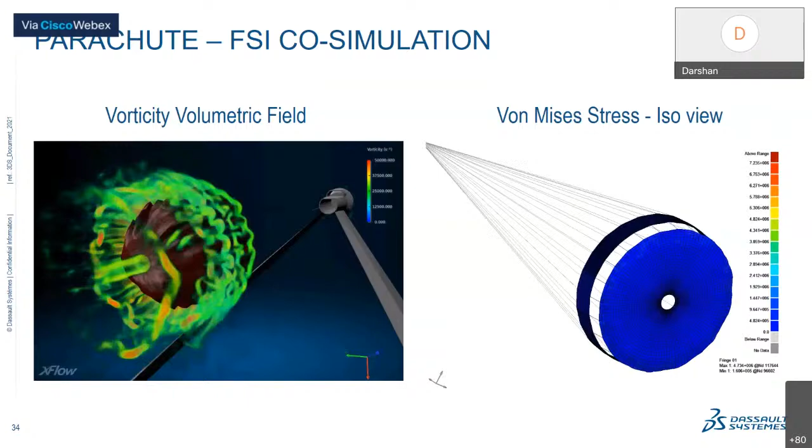Let's look at the first case, which is the parachute, used for decelerating the aircraft when it lands. What you see here is a structural solver coupled with a fluid solver. The structural solver provides information on the kind of stresses this parachute material experiences, and whether these stresses cause the cloth to tear apart. On the CFD side, we can see if the flow is able to open up the parachute well, and what amount of drag is generated, so we can estimate the landing distance of the aircraft.

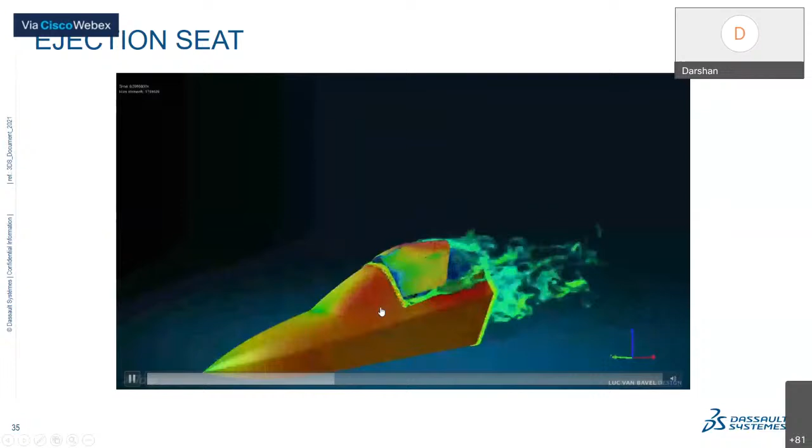The last two topics are ejection of the seat, which is quite difficult to try in reality. As you can see, you would require a lot of test setup and dummy mannequins placed in to assess the kind of forces one would experience. Whereas in simulation, we have considered a human kinematic model coupled with CFD simulation. With this, we can estimate the forces the pilot experiences, whether any part of the aircraft is going to strike him, or if the ejection path goes in the wrong direction. All such information can be obtained with CFD coupled with a human kinematic model.

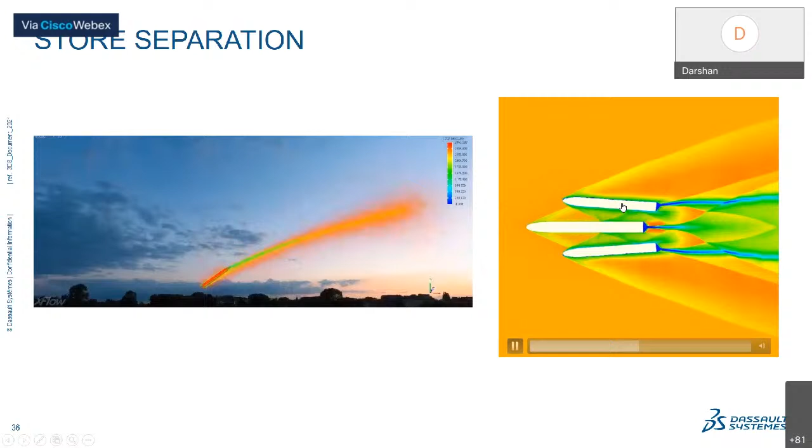We could also look at store separation, as you see here. It's again a fluid structure interaction, but the capability of our solver means it doesn't require coupling with another tool, since we have an inbuilt rigid body dynamics in the CFD solver. With information on the center of gravity of either a booster or missile unit, its weight, and its inertial moments, one can simulate this within the CFD environment. The solver can identify the forces experienced due to airflow, and through the rigid body dynamics built into the solver, show how the part detaches, whether it strikes the main aircraft or falls far away, and the location where the booster is going to fall.

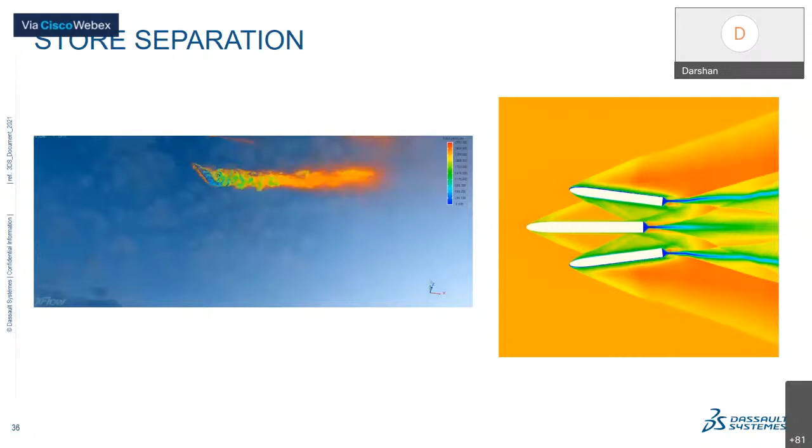This brings me to the last part of the slide, the topic of discussion today, which is simulation-driven engineering. I want to conclude by saying the solution offered by our system can cater to quite many problems that the aerospace and defense industry would come across while trying to improve the product.

One is aerodynamics, which we saw for aerodynamic efficiency, and it can also be used for propulsion systems to know the kind of thrust generated. We looked at maneuvers, a more complex aerodynamic situation involving dynamic aero loads, and we can also assess the stability of the flight, or the damping, meaning how long it takes for the flight to come to a stable condition when disturbed.

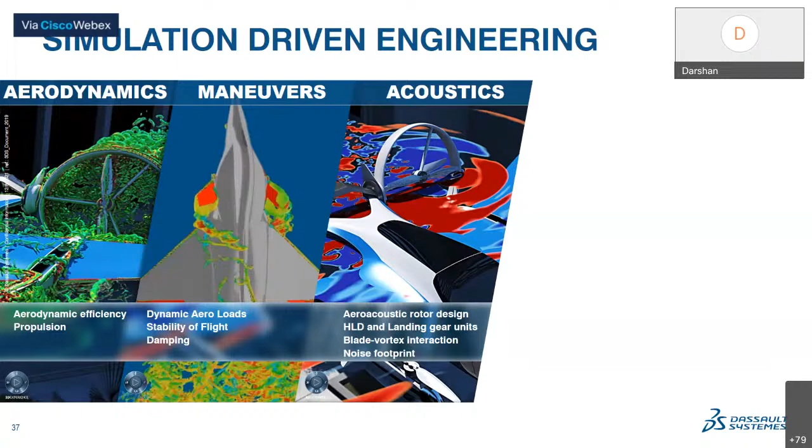We also saw in detail a vast coverage on acoustics, including the ability to design rotors or high lift designs, or modify parts of the landing gear to reduce noise, and see what the noise footprint is on the ground and whether it's within noise target limits. We looked at propulsion, basically to identify thrust load estimation, which can also be done for blade designs, etc.

Lastly, fluid structure interaction, which is more complex than individual physics since you're dealing with two or three different kinds of physics. We looked at store separation and ejection of the pilot. The application isn't limited to these; wherever flow interacts with structures or any other component that in turn impacts the flow itself, it can be addressed through FSI simulation.

Overall, I want to conclude by saying the solution offered by our system can address the overall domain requirements for improving products in the A&D sector, as well as other sectors that have a need for aerodynamics, acoustics, and other physics.